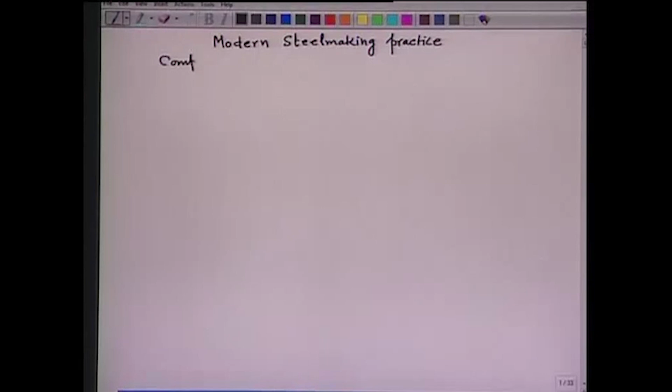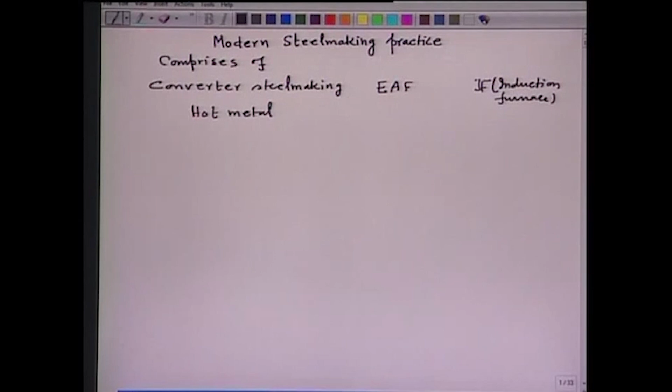Converter steel making, then electric arc furnace steel making, and a small portion of steel is also made in the so called IF, that is induction furnaces. The principal raw material in converter steel making is hot metal. The principal raw material in electric arc furnace is scrap. The principal raw material in induction furnace is also scrap.

The proportion of crude steel production from converter steel making comprises of the order of 60 to 70% around the world, 30 to 35% from electric arc furnace, and around 10% from induction furnace.

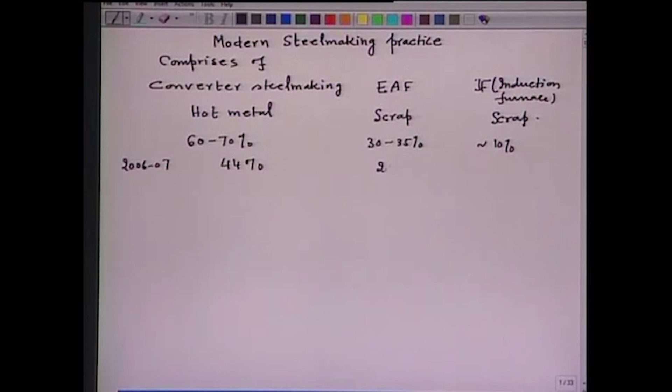In India, however, the proportion is slightly different. In the year 2006-2007, the proportion of converter steel making in total crude steel production was 44%. The proportion of electric arc furnace was 26%. However, the proportion of induction furnace in total crude steel production was very high, of the order of 30%. Anyway, this is just data which I have given you.

So, let us take first of all converter steel making. At the moment we are talking of carbon steel making.

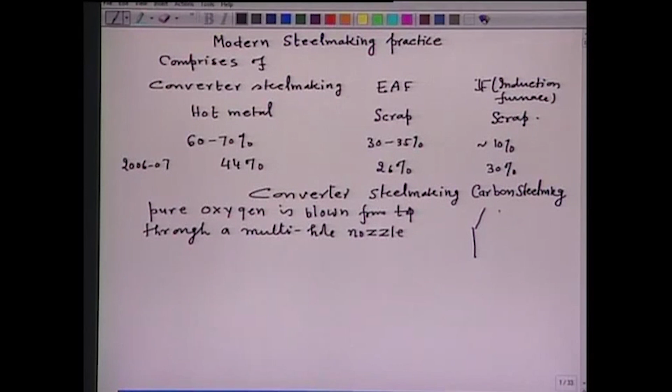Now, in the converter steel making, pure oxygen is blown from top through a multi-hole nozzle, nozzle shape is something like this. This is a vessel, this is the metal, and here is a centrally placed vertical lance, the bottom of which is fitted with the multi-hole nozzles.

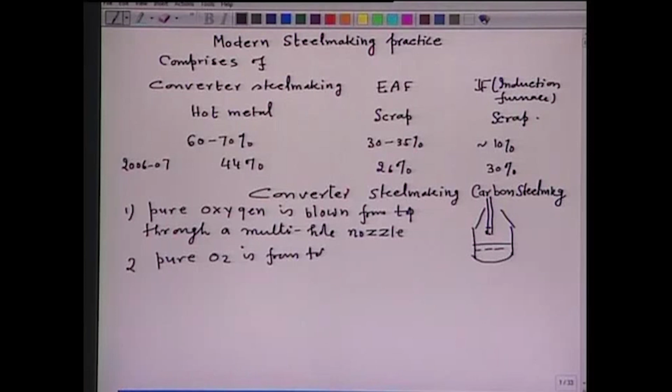This is number 1. Number 2, in another version, pure oxygen is blown from top, and through the bottom some inert gas is also injected, and that is called bottom stirring. So, here if I can show it, this is the lance which blows pure oxygen. This is a refractory lined vessel, and through the bottom inert gas is injected.

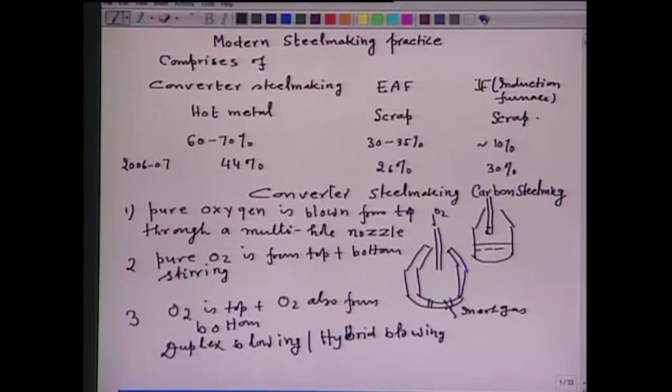In still another version of converter steel making, oxygen is blown from top plus oxygen also from bottom. Both versions, that is 2 and 3, are called duplex blowing or hybrid blowing, and some also call them top blowing oxygen and bottom stirred processes, or top and bottom blowing processes.

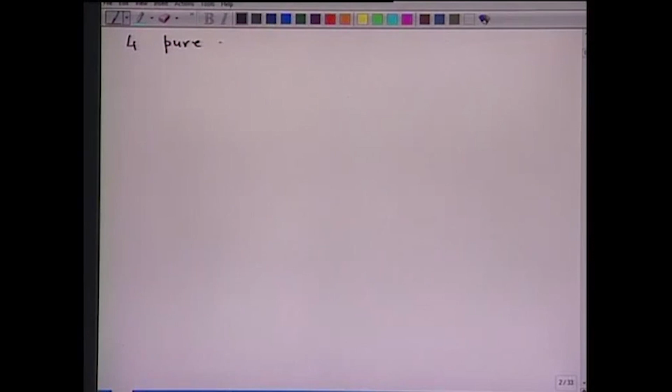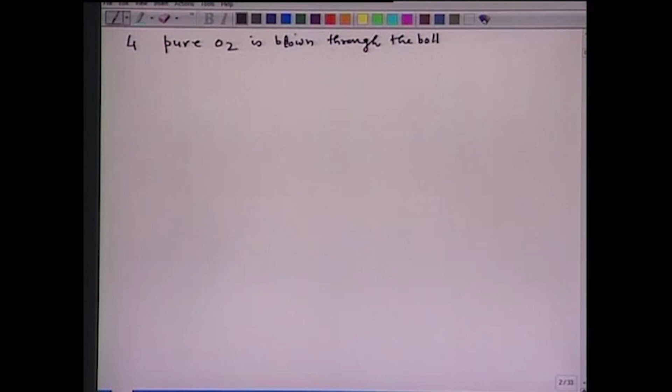Still another version, pure oxygen is blown through the bottom. This particular method, called bottom blown steel making, is hardly used in any part of the world. It is just a modified version of the basic Bessemer process, where air was injected in 1878. Instead of air, in the modification oxygen was introduced through the bottom, but as such, pure bottom blowing steel making is not practiced to my knowledge.

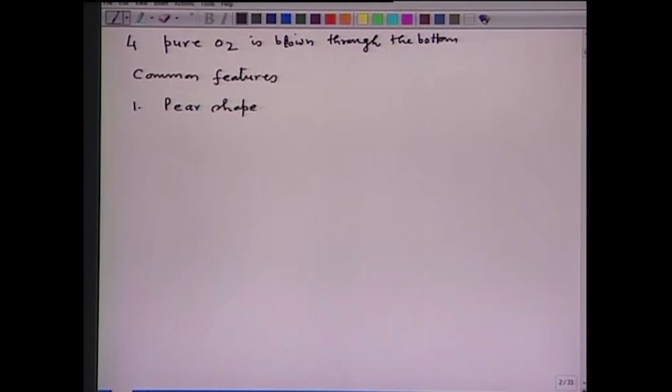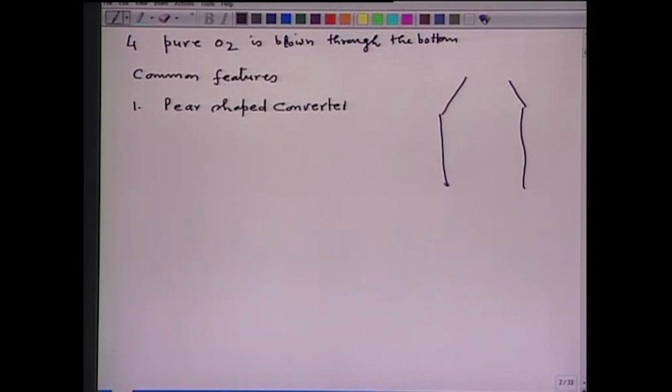So, now if you note all these variations or versions of converter steel making, some features are common. First, in all versions a pear shaped converter is used. Second common feature is that oxygen is blown from top, through a lance which is fitted with multi-hole nozzles. So, this is the lance, this is a pear shaped vessel, of course it is refractory lined.

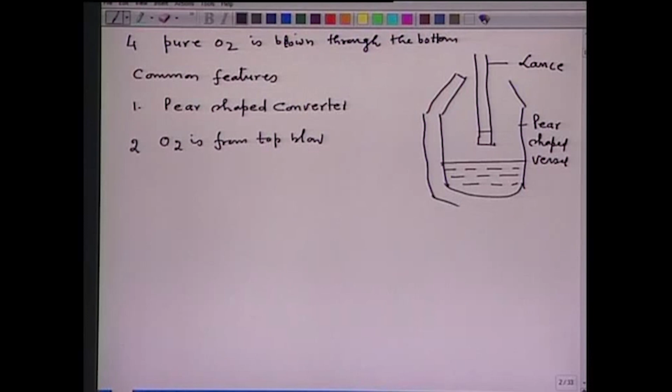And the third common feature is hot metal is the principal raw material. So, whether we have pure top blown steel making, or top and bottom blowing, or so called hybrid blowing or duplex blowing processes, these three features are common in all three processes.

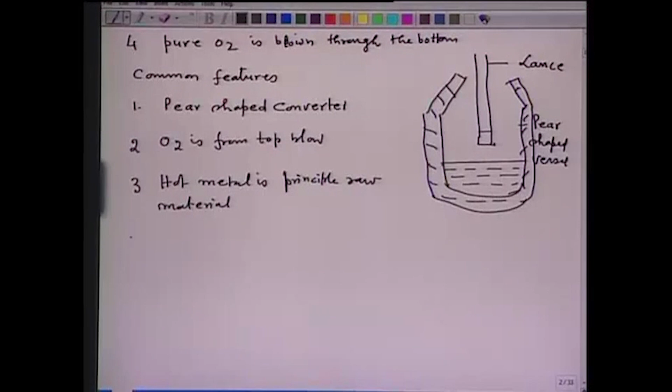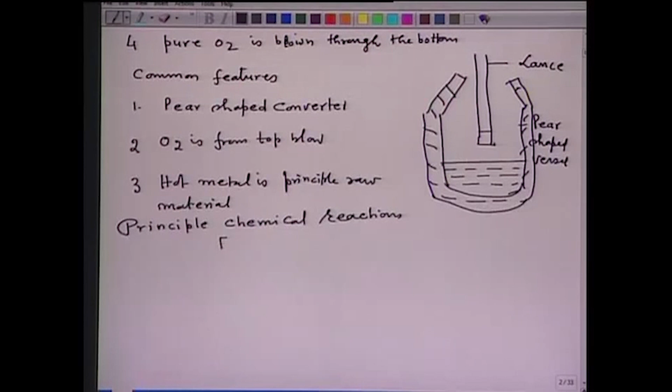Now, let us see what the principal chemical reactions are. Some of the principal chemical reactions are: Fe plus O equals FeO; carbon plus O equals CO; Si plus 2O equals SiO2; 2P plus 5O equals P2O5; carbon plus FeO equals CO plus Fe; Fe plus MnO equals FeO plus Mn.

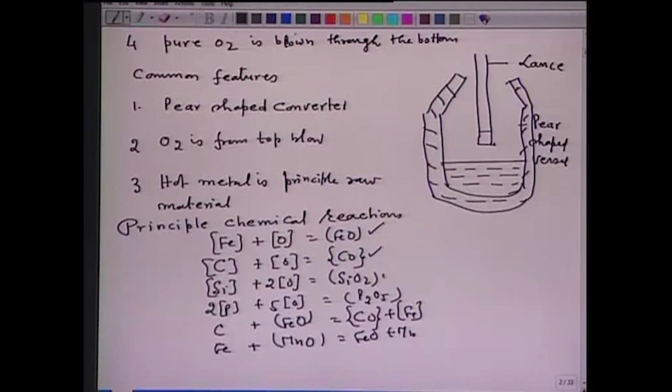Now, note all these reactions: iron oxidation, carbon oxidation, silicon oxidation, phosphorus oxidation — they are all exothermic in nature, and you must note that in all variations of converter steel making, no heat is supplied from outside. After noting these essential features, all these processes are called basic oxygen furnace processes, BOF, or basic oxygen steel making, BOS. These are the various names you will find in different books.

Now, in recent years, pre-treatment of hot metal has become in some plants a standard practice. The pre-treatment of hot metal means the hot metal which is tapped from the blast furnace is treated for silicon, sulfur and phosphorus content, and this practice of pre-treatment is used whenever it is required to produce high quality steels.

For example, steels which require good surface finish, steels which require freedom from internal cracks, and in certain applications when sulfur and phosphorus content requirement is less than 0.01%. So when on certain applications the chemical composition is so much restricted, then naturally the pre-treatment of hot metal, that is control of silicon, sulfur and phosphorus before hot metal is charged into the converter for steel making, is required to be done. So before we go into the details of modern steel making practice, I would like to give you a little information about the pre-treatment of hot metal.

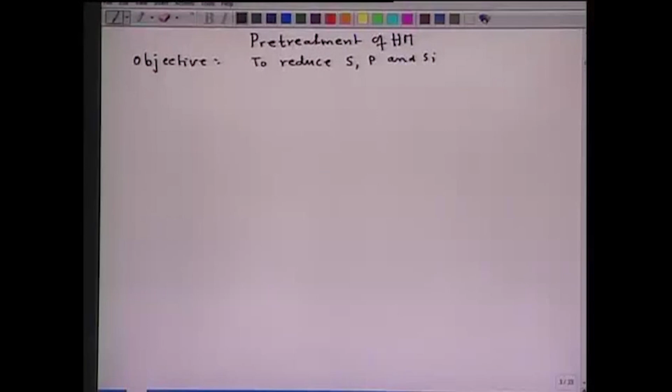Now, first of all, removal of sulfur is called desulfurization. Now, certain important characteristic features of sulfur: sulfur exhibits

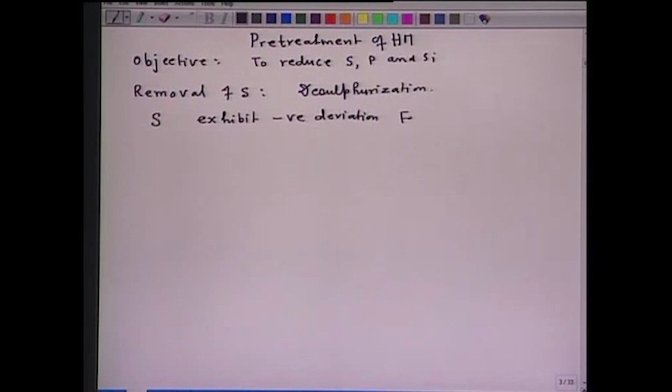negative deviation from Henry's law. What does it mean? Negative deviation means sulfur has a strong tendency to form a compound like FeS. The bonds between FeS are very strong, and hence it is not easy to remove sulfur from hot metal unless some

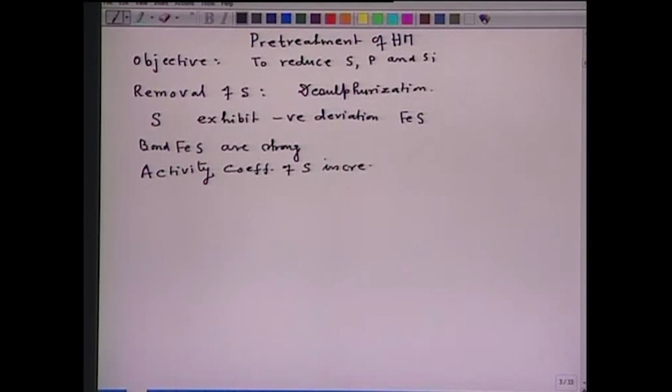conditions are created. Number 3, the activity coefficient of sulfur increases with increase in carbon, silicon and phosphorus.

Now let us see what is a desulfurization reaction. I will put DES as desulfurization. So, a desulfurization reaction. Now first of all, desulfurization reaction is a slag-metal reaction.

Metal sulfur is present in the elemental form, whereas the slag sulfur is present in the ionic form. That means transfer of sulfur from metal to slag requires the following steps. First, sulfur should be transported to the metal-slag interface. There it should receive 2 electrons, so that it gets transferred to S2 minus ions. In order to maintain electrical neutrality at the slag-metal interface, a reverse transfer of ions should occur from the slag side to the metal.

2 electrons will be generated at the slag-metal interface, and then sulfur will be converted to S2 minus. It will go into the slag, and the ionic species which gives ions, for example O2 minus, then O will transfer into the metal. So this is what I am going to illustrate over a diagram.

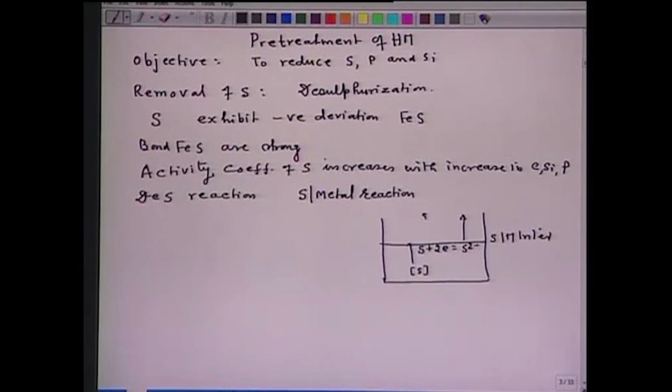For example, if I take - so this is the slag-metal interface. Now let us see, sulfur is sitting somewhere here. When it transfers over here, the sulfur must receive 2 electrons to be converted to S2 minus, and then S2 minus can be transferred into the slag. So this I will put as slag and this as metal.

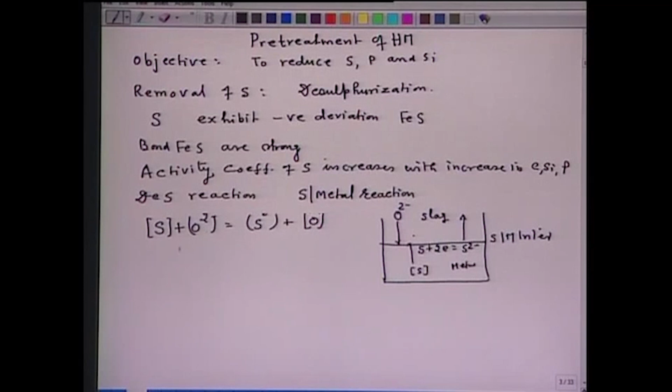So here there should be O2 minus ions, and these O2 minus ions are transported to the slag-metal interface on the slag side. So the transfer of sulfur from metal to slag is accompanied by transfer of oxygen from slag to metal. So the same reaction I am going to write down now: S plus O2 minus equals S2 minus plus O. This is in the metal, this is in the slag, this is in the slag, and this is in the metal.

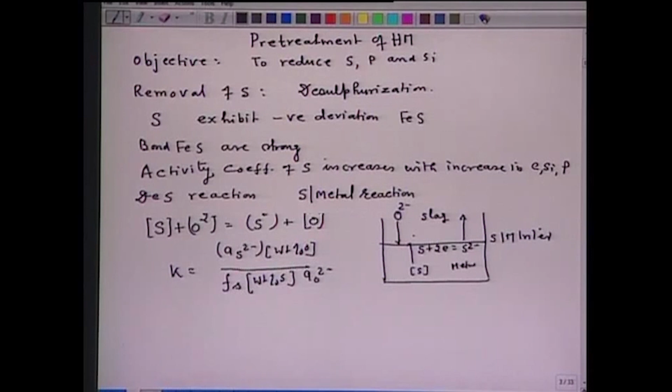So if I write down the value of K, K will be equal to activity AS2 minus times weight percent O, upon Fs times weight percent sulfur times activity of O2 minus. Now, a rearrangement of this equation in the form of the desulfurization ratio, we can put it as AS2 minus upon weight percent sulfur, which is approximately equal to weight percent sulfur in slag upon weight percent sulfur in metal, which will be equal to K times Fs times activity of O2 minus upon weight percent O.

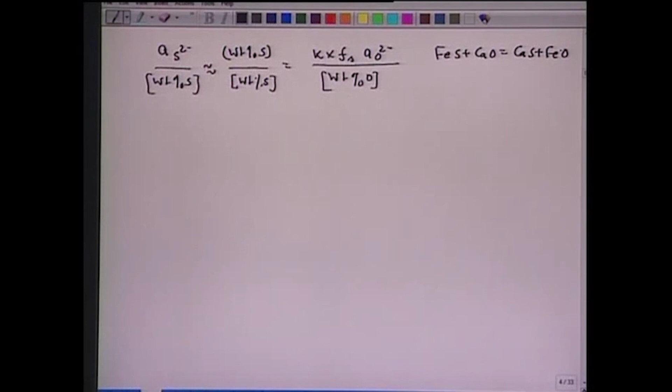Now the same reaction can also be put in molecular form: FeS plus CaO equals CaS plus FeO. You can write down the value of K, and arrange the variables such that you get on the left hand side a desulfurization ratio, for example activity of CaS upon activity of FeS, which is approximately proportional to weight percent sulfur in slag upon weight percent sulfur in metal, which will be equal to K times activity of CaO upon activity of FeO. Now this is what it can also be done like this. Now, what we can derive from this equation is the information for efficient desulfurization.

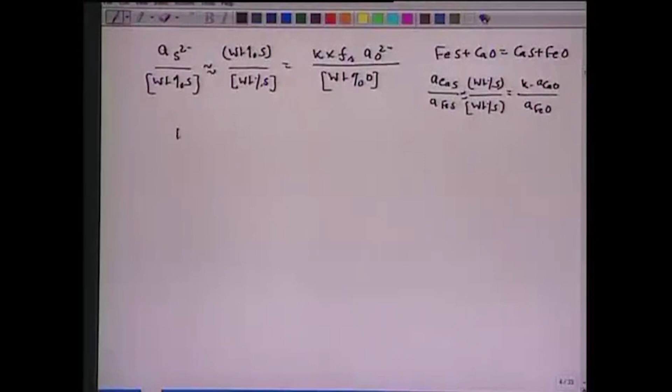First of all, the left hand side of the equation, that is weight percent sulfur in slag upon weight percent sulfur in metal, should be high. If it is high, then weight percent sulfur in metal will be low. So, in order for this ratio of weight percent sulfur in slag upon weight percent sulfur in metal to be high, K must be high. I write down the constant, high value of K.

High value of equilibrium constant, again high value of Fs, high value of Fs, then high value of activity of O2 minus ions, high value of activity of O2 minus ions in slag, and low value of weight percent O in metal.

Similar information you can obtain from the molecular picture also: high value of K, high value of activity of CaO in slag, low activity of FeO in slag.

Anyway, let us concentrate on these four points. High value of K depends on temperature and accordingly temperature can be adjusted. High value of Fs, how can it be obtained? Initially I said that the presence of carbon, phosphorus and silicon increases the activity coefficient of sulfur, and therefore the presence of carbon, silicon and phosphorus enhances desulfurization.

The third point is high value of activity of O2 minus ions. What does it mean? High value of activity of oxygen ions means you should have a highly basic slag. Now, recall the definition of basicity on the basis of oxygen ions. There we said it is the free oxygen ions that are important and that contributes to the basicity of slag. Fourth point is low value of weight percent oxygen in metal.

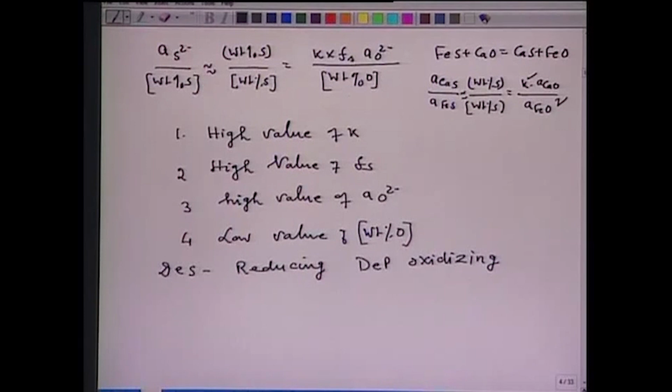About the removal of silicon and phosphorus we have already done. So desulfurization, just summarizing, requires reducing condition, dephosphorization requires oxidizing condition, and so is silicon also. Now, given this information, we know about the removal of sulfur, silicon, and phosphorus.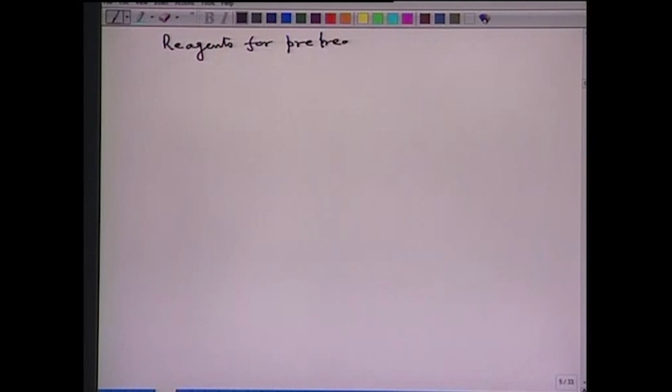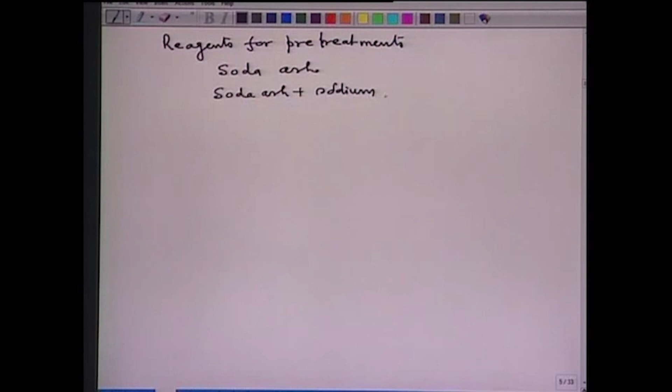Now, this pre-treatment of hot metal consists of treating the hot metal in the transfer vessel. Now, the reagents for pre-treatment: soda ash, then soda ash plus sodium sulphate, calcium carbide and magnesium granules.

Now, for your information, magnesium is a very strong desulfurizer. These reagents can be added or they can be injected. Now, hot metal pre-treatment is carried out in transfer vessels. You know that when hot metal is carried over to the LD shop, it is carried in a torpedo ladle.

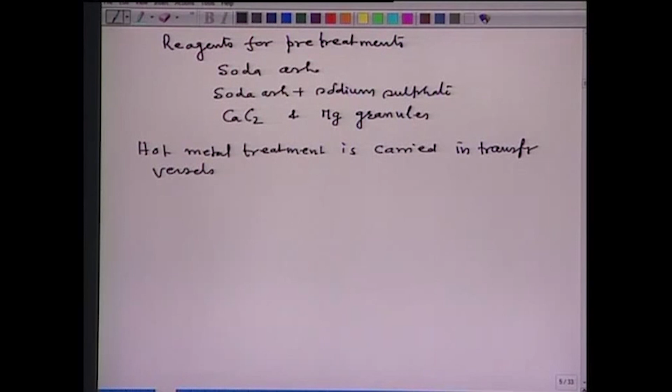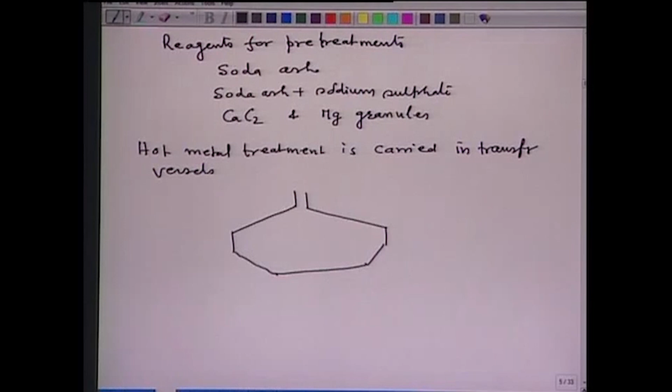Now, a torpedo ladle looks something this way. So in a torpedo ladle, one adds here, for example, nitrogen injection along with the reagents, sometimes scale is added to create an oxidizing atmosphere. So this is the torpedo car. Now, this torpedo car, their capacity can be as high as 100 or 300 tons capacity. In the torpedo ladle, the pre-treatment is carried out.

Another place could be when the metal is tapped from the blast furnace, through the runner. When the metal flows from the tap hole of the blast furnace to the ladle, there is a long runner, and in that runner also the pre-treatment can be done.

Now, the reagent consumption is approximately 5 kg per ton minute, and the reagent rate, that is injection rate, could be 45 kg per minute. Hot metal temperature is around 1300 degree Celsius, and it takes around 15 to 20 minutes to attain, for example, 70 to 75% of desulfurization.

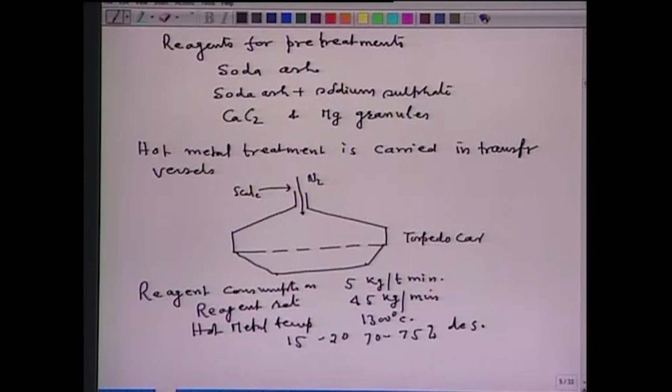Simultaneous removal of sulfur and phosphorus is also being adopted in certain practice. Now, having seen a short account of hot metal pretreatment, we can come back to our modern steel making practice, which we are dealing with as converter steel making. So in the converter steel making, either one can charge hot metal or pre-treated hot metal.

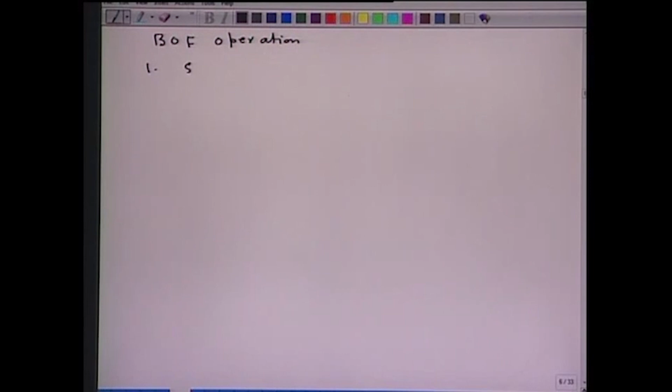So, BOF operation first of all consists of scrap plus hot metal. That means you charge scrap, on top of it you charge hot metal, but the principal feed is the hot metal, which is 60 to 70% depending on the heat balance, and the rest could be scrap. It takes around 2 to 3 minutes for charging.

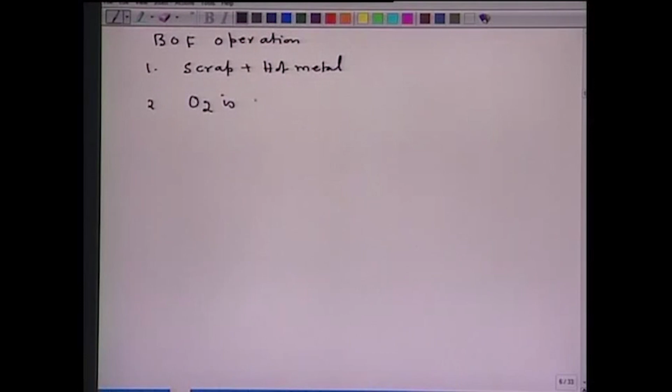After charging scrap and hot metal, the lance is brought into position and oxygen is blown through a lance with multi-hole nozzles. Now, the blowing continues for 10 to 15 minutes, and once the blowing is over, a sample is taken for analysis.

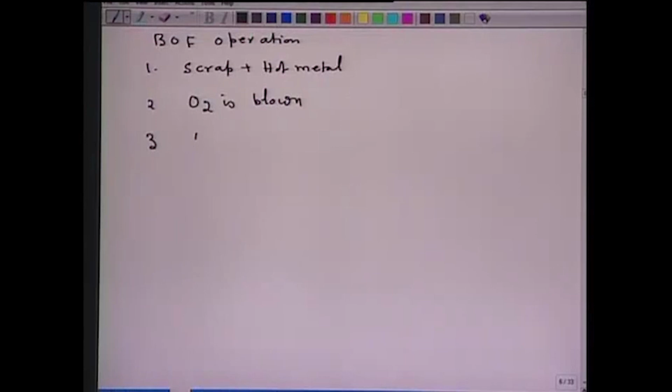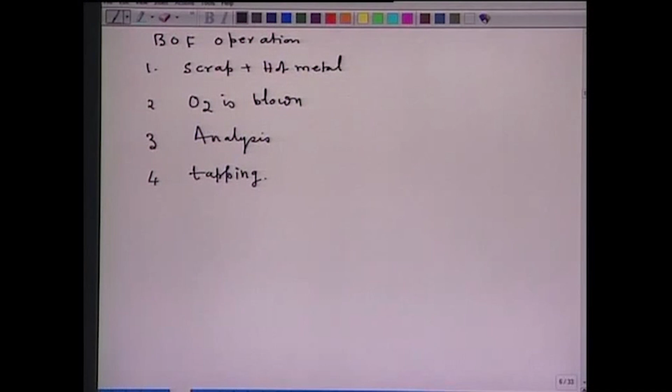Then the third point is analysis, and when the analysis conforms to the specified chemistry of the steel that is required to be produced, then the fourth step is tapping. And here caution is exercised that as far as possible, slag-free tapping is done.

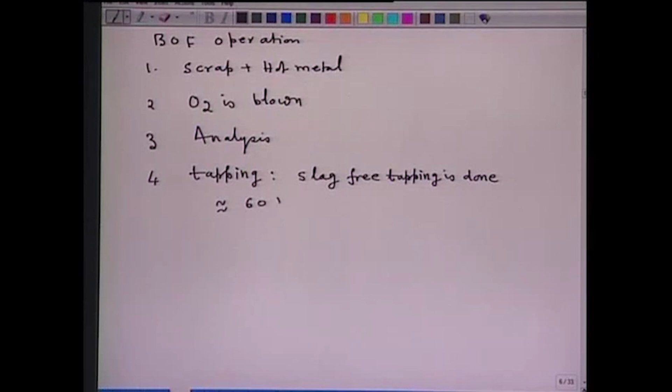So in all these BOF operations, right from charging to tapping, it takes around approximately 60 minutes. It could be 50 minutes or maximum time is 60 minutes. Remember, this particular time of charging to tapping is independent of converter capacity. Whether we have 50 tons of converter or 400 tons of converter, the tap to tap time is approximately of this order of magnitude, and this is the beauty of converter steel making.

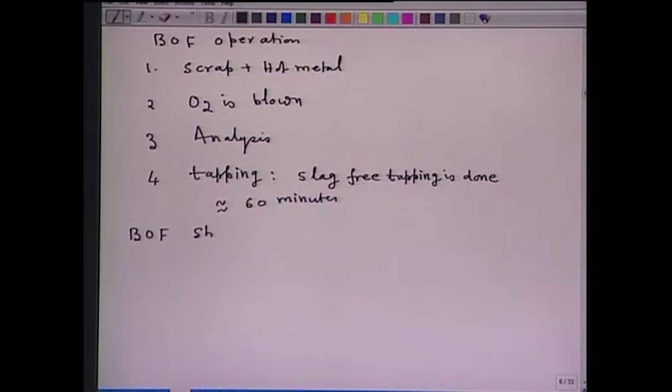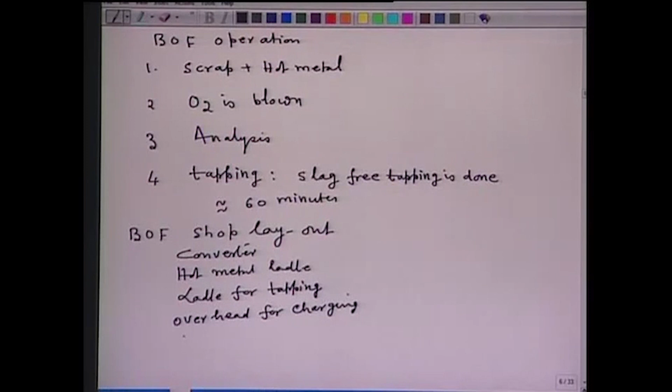Now let us shortly see BOF shop layout. Typically, what is required for the BOF shop layout? We require a converter, hot metal ladle for charging, that is place for hot metal ladle for charging, then you require one ladle or two ladle for tapping, then you require overhead crane for charging, then we require a hood for the transport of the exit gases, and naturally we require the most important component, that is the lance.

So all these things, for example converter, then on the top of it you have the overhead for charging, ladle for hot metal, ladle for tapping of steel, lance it comes through the hood to the converter, and these are all arranged vertically, and the total height of the shop could be around 20 to 25 meters high.

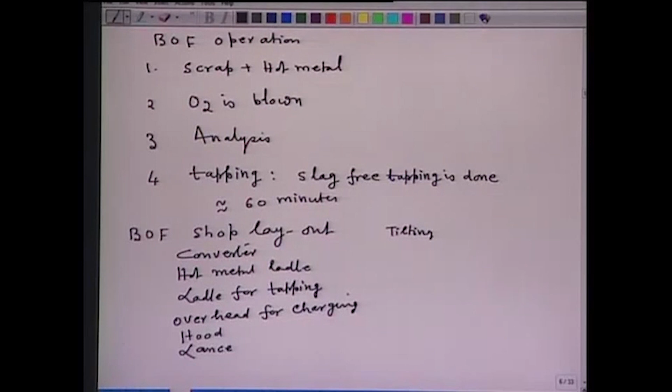And tilting, because for tapping you have to tilt the converter, it is done by electric motors. The typical mass of the converter, though it depends on the capacity, mass of the converter means mass of the converter plus mass of the refractory lining plus mass of the metal, it may go to 800 to 1200 tons depending on the capacity of the converter.

So it is really a shop worthwhile to look and visit the plant. Now let us go to the BOF vessel design.

BOF vessel design. Typically, the BOF vessel looks something this way. This is a refractory lined vessel.

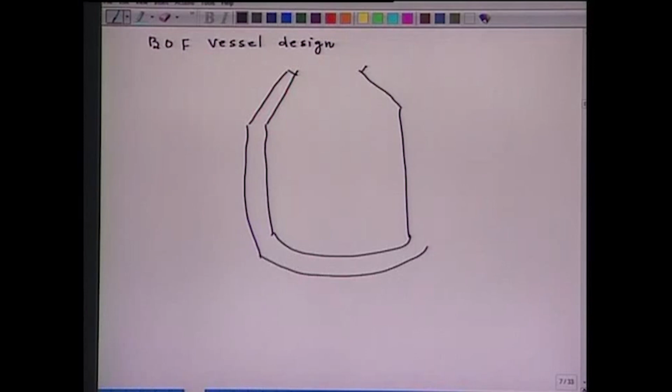This height is called HB. This dimension is diameter of the bath. This is the top lance fitted with nozzles, and this distance from here to the metal height is called lance distance. We will be using this lance distance very frequently. So this is the lance distance, HB that is the bath height.

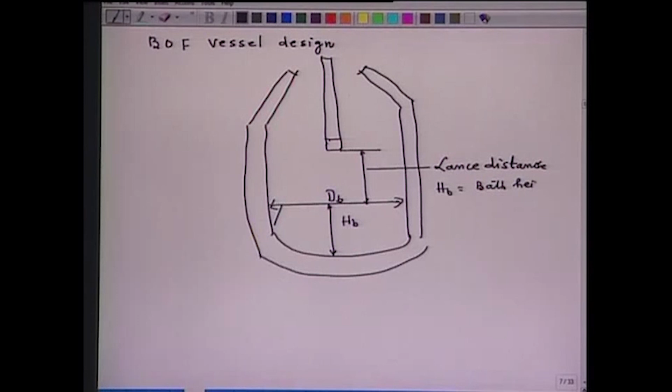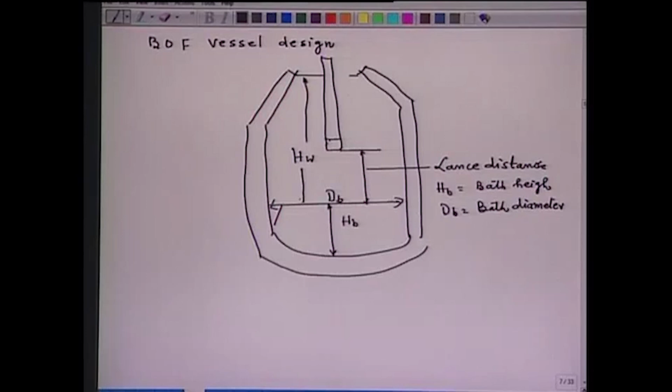Db, that is the bath diameter, and from here to here, this is HW, and HW is the working height of the converter.

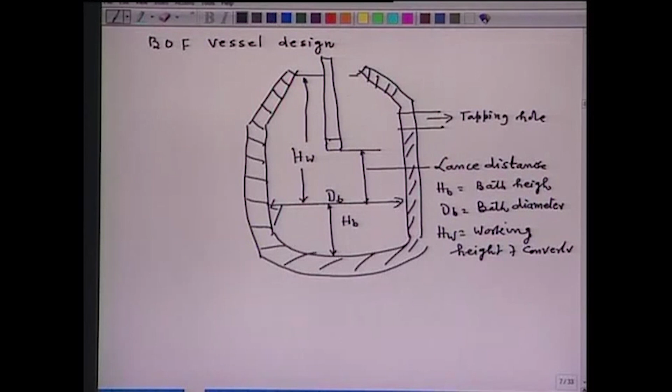This is the refractory lining, to which I will come in detail. Somewhere here tapping hole is provided. This is the tapping hole to tap the liquid steel, because you have to tilt it for tapping. So this particular portion is the conical portion.

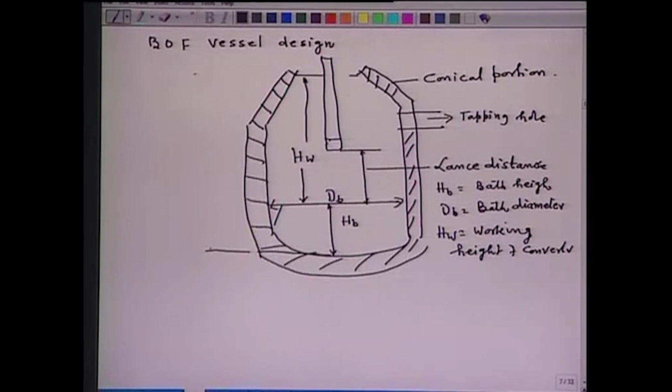And the height from here to here, that is the useful height. So these are the typical dimensions of the converter.

Now the capacity of these converters varies from, let us say, 50 tons to as high as 400 tons or even 500 tons, I do not know, but I think 500 tons is also there. Inner volume upon mass of metal, that is equal to around 1 meter cube per ton.

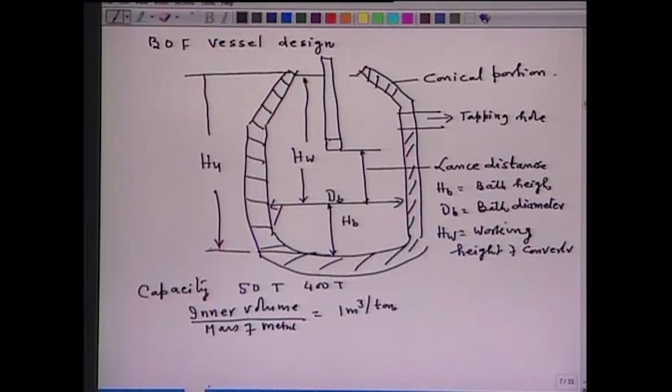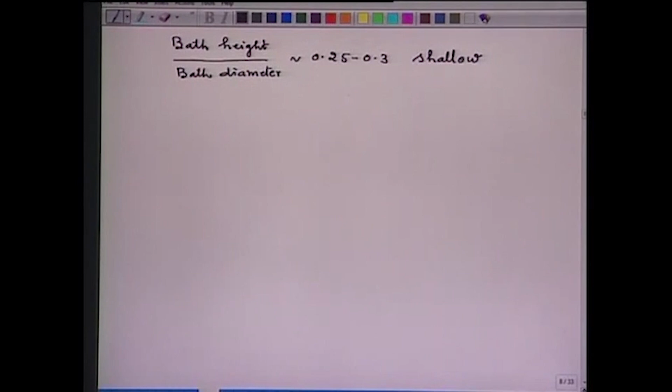Then for all converters, the bath height over bath diameter, which is called aspect ratio of the bath, it varies between 0.25 to 0.3. That means converter steel making baths are shallow. That means the capacity of the converter is increased by increasing the diameter rather than the height, because if you increase the height, then the shop becomes very tall, since you have to charge everything from the top. So the capacity of the converter is increased by increasing the diameter of the bath rather than the height.

Now this point is very important, particularly when we consider top and bottom blowing. I suggest that you please keep this in mind, I may use this at that particular time.

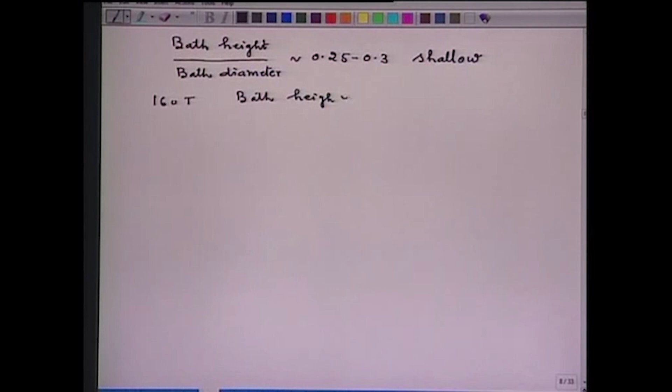So the shallow bath. Now, total height of the converter, for example 150 tons converter, it may vary around 9 meter or 9.1 meter from conical to the bottom. Typically, for example, if the capacity is 160 tons, bath height is around 1.22 meter. I mean these dimensions are approximate, but you should know these are the order of magnitude. Bath diameter is 4.8 meter.

Working height of the converter is approximately 3 to 3.5 times bath height, which in this case is approximately equal to 3.5 to 3.8 meter. Now the concept of working height is to provide the sufficient height to carry out the metallurgical work during refining of hot metal to steel. Shell diameter around say 6 meter, or it depends upon the converter capacity also.

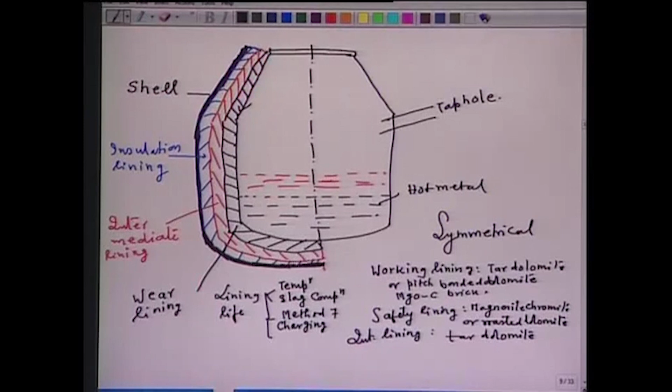Then there is formation of skull at the conical portion of the converter. So these are all the so-called refractory parts of it. Now let us see the lance.

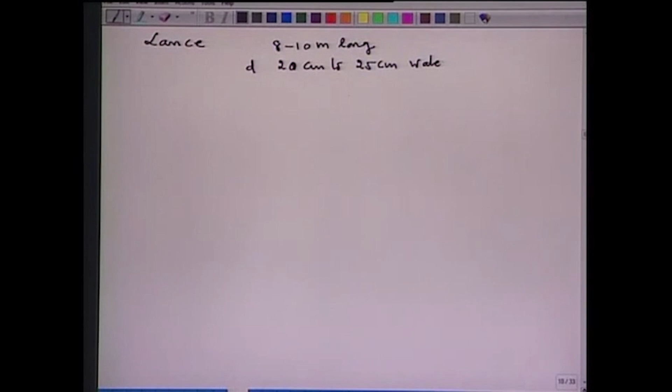The lance is in fact the heart of converter steel making. It is 8 to 10 meters long. The diameter of the lance varies from 20 centimeters to as high as 25 centimeters, and it is water cooled, at the rate of 50 to 70 meter cube per hour at 5 to 6 kilogram per centimeter square pressure.

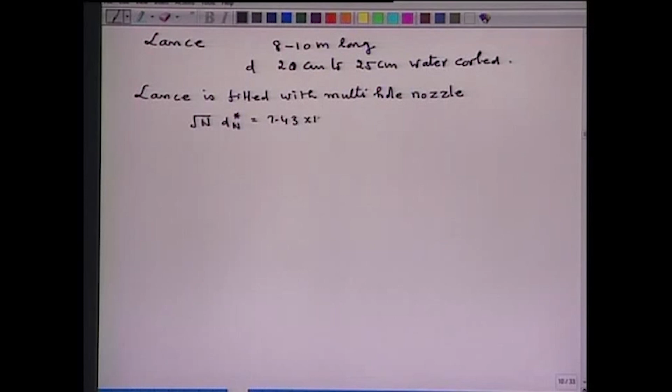The lance is fitted with multi-hole nozzles. The number of nozzles and the diameter bear a relationship with the converter capacity. The relation is root n, where n is the number of nozzles, into throat diameter, equal to 7.43 into 10 to the power minus 3, converter capacity raised to the power 0.446, where n is the number of nozzles, dn is the diameter of each nozzle, and mt is the converter capacity.

For example, if I take 150 tons capacity, then dn from this equation comes out to be equal to 35 millimeter when n is equal to 4.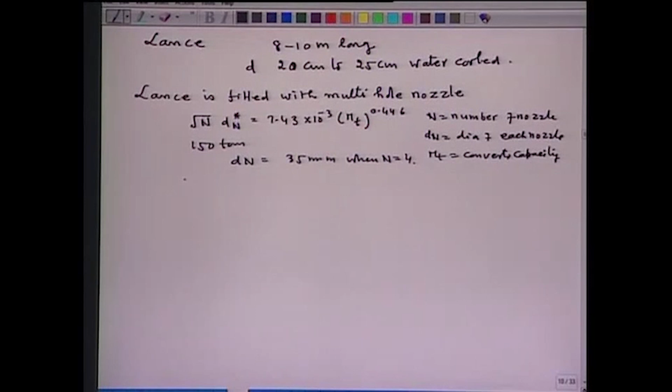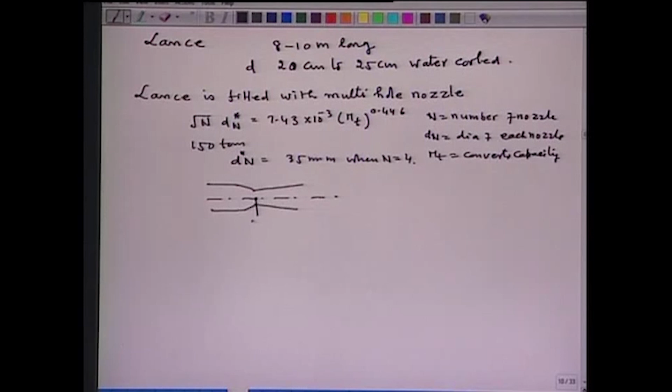The nozzles are Laval type nozzles, and the nozzle looks something this way. This diameter is called d star n, which is 35 millimeter, and they are designed with an exit diameter of around 49 millimeter. The angle of divergence is around 4 to 6 degree. This diameter is around 50 millimeter, this is 49 millimeter, this is 35 millimeter. So this is how a Laval nozzle looks.

Now the 4-hole lance looks something like this. If this is the lance tip, this is the center point. On the right side I have shown a 4-hole nozzle fitted at the bottom of the lance. These 1, 2, 3, 4 are symmetrically placed nozzles, and the angle of inclination of each nozzle with the axis of the lance is around 10 to 12 degree, to provide a jet which is non-coalescing in nature downstream of the lance.

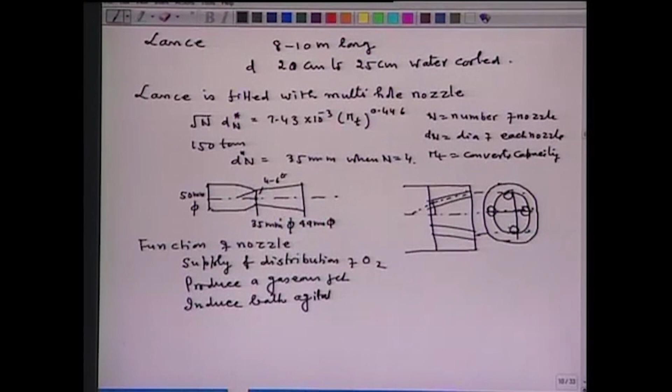The function of the nozzle is, for example, supply and distribution of oxygen, to produce a gaseous jet, to induce bath agitation, and to produce droplets.

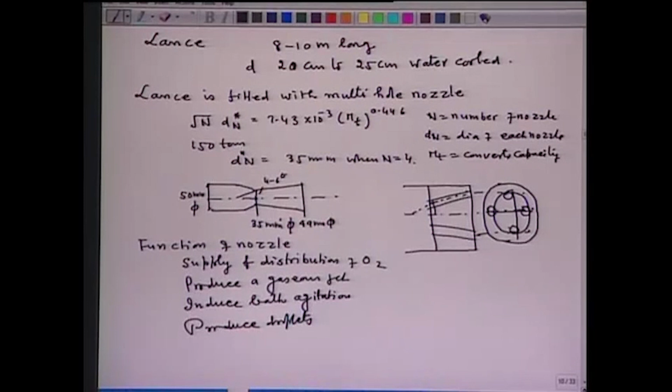That is why the nozzles are fitted at the bottom of the lance, to inject oxygen at a very high pressure. Another important feature of the lance is that these lances are water cooled, and the bottom of the lance fitted with the nozzle has a copper tip, and water cools it up to the copper tip. If not, the tip will melt, so very strong water cooling is necessary for these lances. Now let me go to the charge calculation.

We go to the charge calculation. For charge calculation one has to do material balance, and material balance input must be equal to output. So all inputs are collected on one side and all outputs are collected on the other side, then the balance of various elements are made.

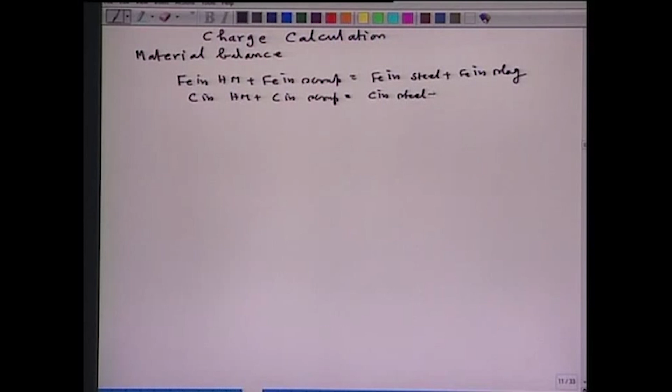For example, iron in hot metal plus iron in scrap, that is equal to iron in steel plus iron in slag. Then carbon in hot metal plus carbon in scrap, that is equal to carbon in steel plus carbon in waste gases. Similarly, silicon in hot metal plus silicon in scrap if it is there, that is silicon in steel plus silicon in slag, and so on.

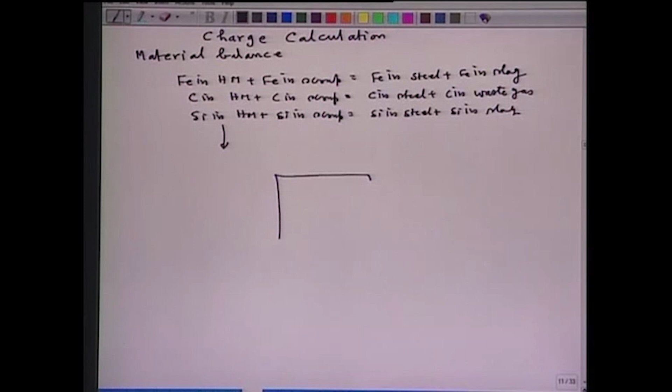You can make the balances of each element, and these balances can be solved for knowing the quantity of each input and output. Now let me illustrate by a simple example. This is the box where I am putting my input.

Say input consists of hot metal, and the hot metal is having 0.8% silicon, 0.2% phosphorus, 0.25% manganese and 4% carbon, and 94.75% iron. I am adding here scrap, which is 0.1% carbon and 99.9% iron, and I am adding around 15% of scrap.

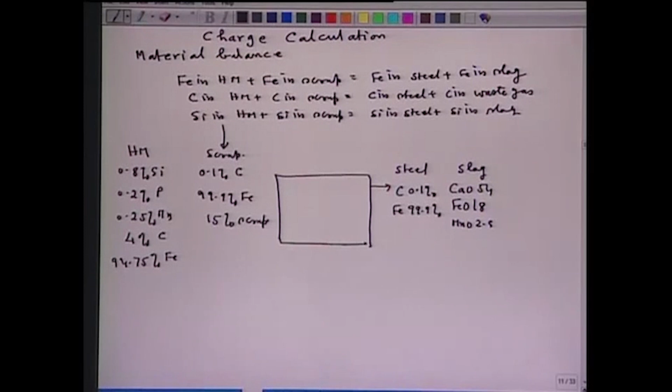I am producing steel with the composition say carbon 0.1% and rest iron, which is 99.9%. I am producing slag, which is having CaO 54%, FeO 18%, MnO 2.5%, and the basicity ratio CaO upon SiO2 on weight percent that is equal to 3.5, and the gases which I am producing, they are having 15% CO2 and 85% carbon monoxide.

Now I am using 1000 kg hot metal, and of course I am adding flux also. So now let us calculate amount of steel, amount of slag, amount of oxygen, and amount of waste gases. Amount of flux can also be calculated.

If the composition of the flux is given, then for example, most of the time lime is added. So lime in flux enters to lime in slag, and from that balance amount of flux can also be calculated. Now let me illustrate by this.

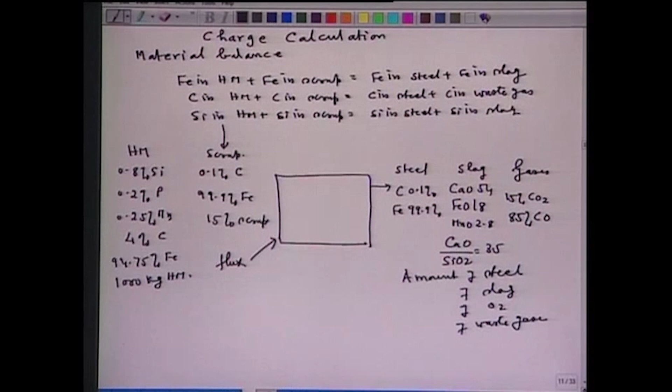Say for calculation of the amount of steel, for example, I do the iron balance: 1000 kg hot metal, 150 kg of scrap. If I do the iron balance, let me put it, say X is amount of steel and Y is amount of slag.

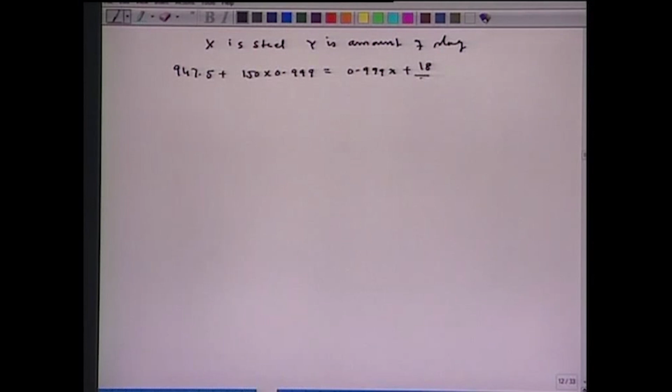So I do the iron balance. Iron balance will give me 947.5 plus 150 into 0.999, that is equal to 0.999x plus 18 by 100 into y into 56 upon 72. Now I do manganese balance.

If I do manganese balance, then immediately I get 2.5, that is equal to 0.025 into 56 upon 71 y. I solve both the equations, I get Y is equal to 126.7 kg, which is the amount of slag that will be produced, and amount of steel that will come is 1080.68 kg steel will be produced. That is how you will be solving the material balance or charge calculation.

Then now, in order to calculate the amount of exit gas, what I do is the carbon balance. So if I do the carbon balance: carbon in hot metal plus carbon in scrap, that is equal to carbon in steel plus carbon in waste gases.

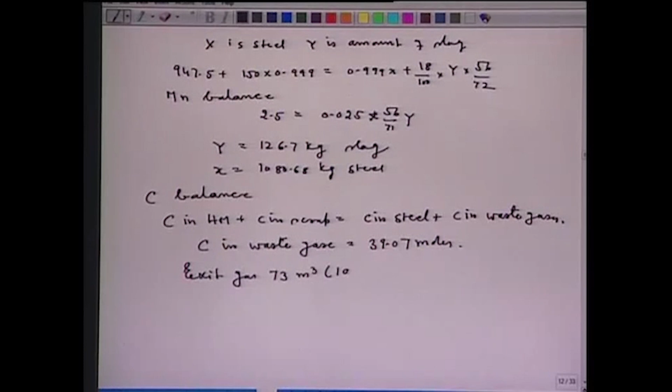So if you do all these balances, then we can find out the carbon which is gone in waste gases, that will come to 39.07 moles. From here the percentage of CO and CO2 is given, so we can find out the amount of CO2 and CO. So the exit gas you can simply calculate will come out to be 73 meter cube at 1 atmosphere and 273 Kelvin. Now we can calculate the amount of oxygen required.

The oxygen required: silicon to SiO2, carbon to CO2, carbon to CO, Mn to MnO, and all these oxidation reactions are to be written, and accordingly you find out the amount of oxygen that is required, how much amount of element is being oxidized.

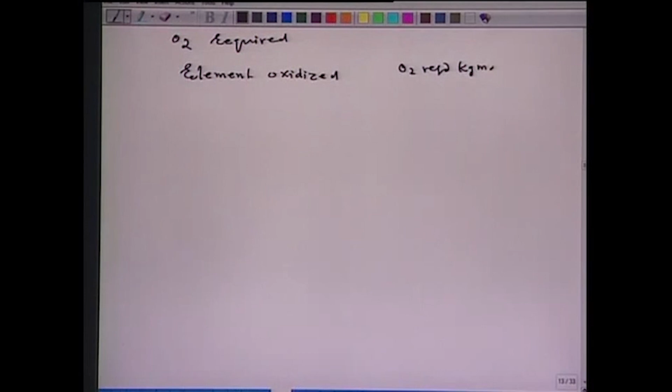So if I write immediately the element oxidized, and then oxygen required in kg moles: say I oxidize 8 kg silicon, 2 kg phosphorus, 2.5 kg manganese, 5.86 kg carbon goes to CO2, and 33.21 kg carbon goes to CO, and 17.66 kg iron goes to FeO.

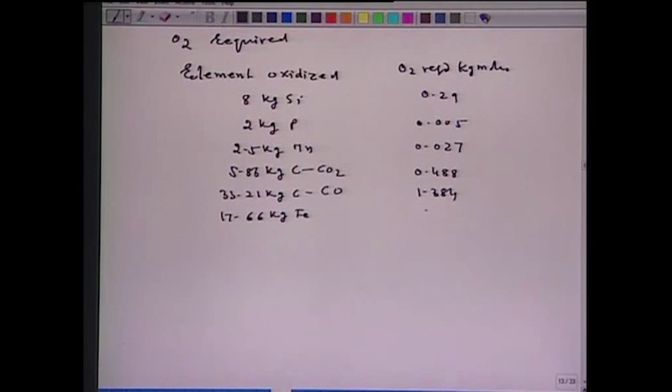Now the oxygen required will be here 0.29, here it will be 0.0058, here it will be 0.027, here it will be 0.488, here it will be 1.384, here it will be 0.158. If I sum total it, I will get 2.3528 kg moles of oxygen.

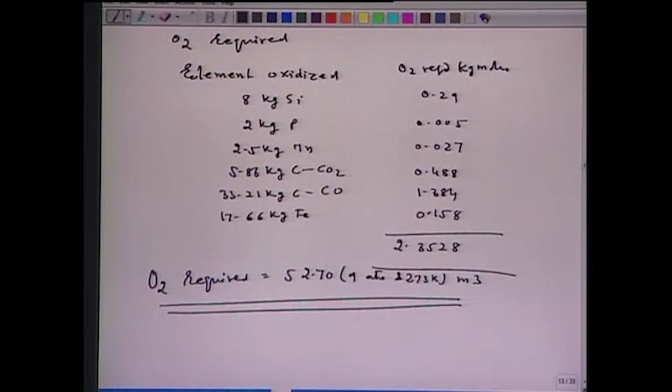Now, 1 kg mole is 22.4 meter cube at 1 atmosphere and 273 Kelvin. So oxygen required you can simply get by multiplying 2.3528 by 22.4. So you will be getting around 52.70 at 1 atmosphere and 273 Kelvin meter cube. This is the oxygen required in order to convert 1 ton of hot metal to steel.